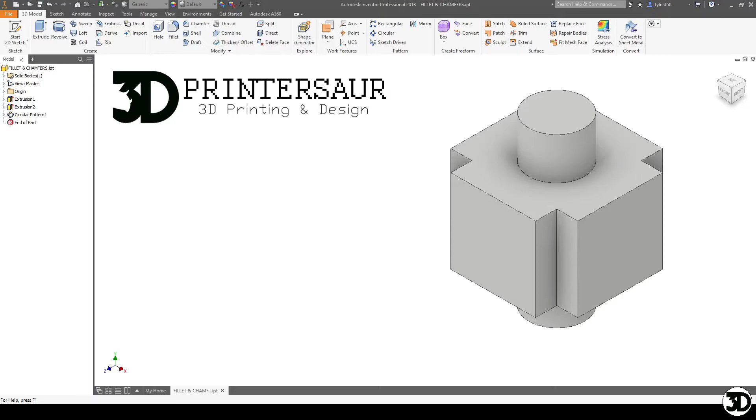These are both great features to get rid of sharp edges, to add details to a component, or to potentially strengthen a zone that you have on a feature.

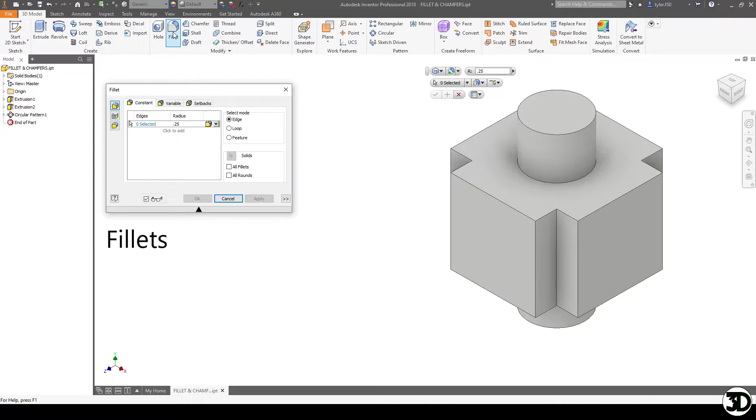So to start off with, we're going to use the fillet feature. This feature is great because it adds a rounded edge as compared to the chamfer, which gives you more of a straight cut edge. So we're going to just do a quarter inch fillet, and we're going to use this edge here. And as you can see, as soon as I click those edges, it rounds them off.

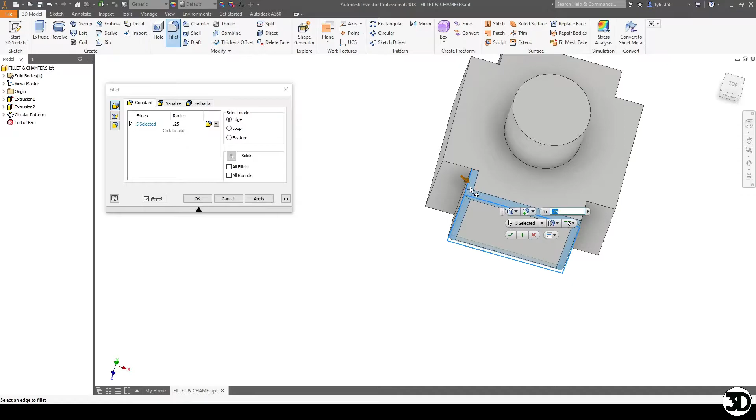So here you can see it's rounded all those edges. I can also choose these edges here, and what that'll do is it'll just give it a little bit more of a rounding detail. I would typically do this for, let's say, a lid for a box would be a great example.

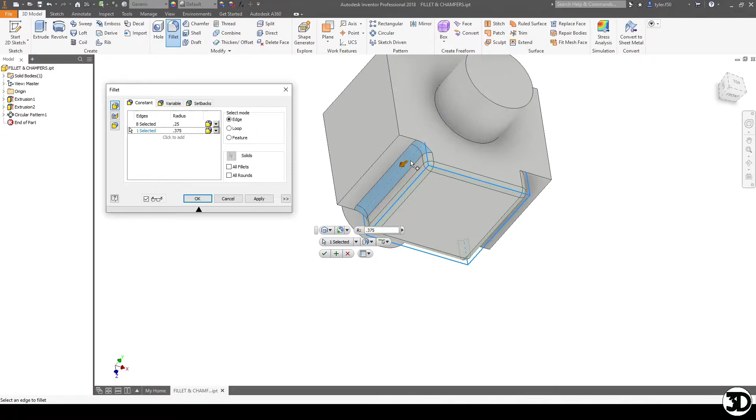A whole slew of different things, of course, that's up to you to find out. Next thing you can actually do with a fillet is this detail in here I could do. So I'm going to click to add, and I'm going to add another one that's going to be a little bit bigger, 0.375, and click it into here. So you can see I've made a bigger fillet on these two edges, and essentially what that does is it just makes it so there's a little bit more material and there's less of just that corner edge.

Of course, if I wanted to change this, I can make it 0.125 and it can make that fillet in there as well.

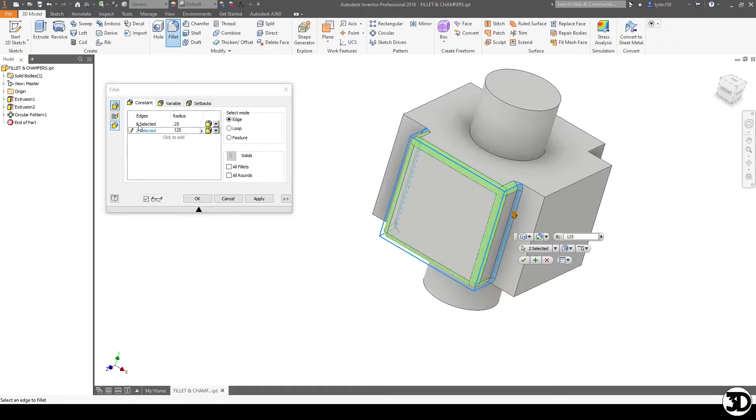Another thing you can do with a fillet, and this is one of my preferences for a cylinder that's on a surface, is doing a fillet on the bottom where it connects to the top of a surface. I typically find that what this does is it takes away the pressure point of that straight edge meeting, and it just evens it out throughout the curve.

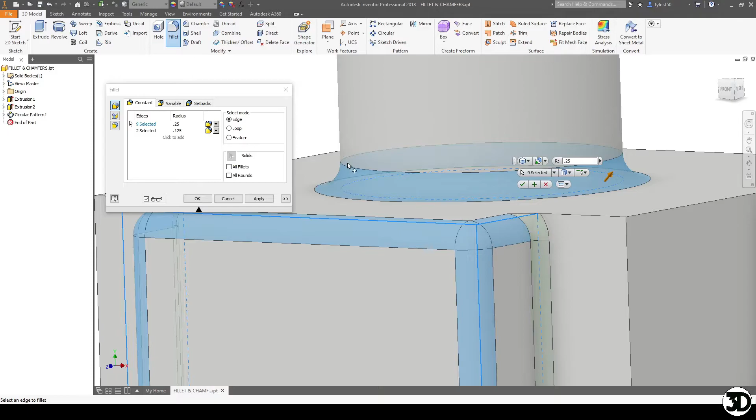Another thing you can do is a fillet on the top edge. I usually like to have a chamfer on the top, but that's just because of the engineering background I have with metal. That's usually what they do when they have a lathe. So that's some of the features you can do with the fillet.

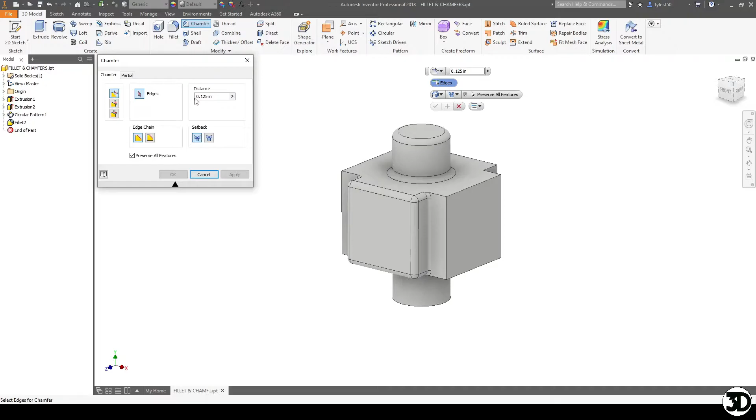Now that we're done with that, we're going into chamfers. There's a couple ways that you can use these. So to start off with, we're going to just use it the basic way. We're going to just turn this around the other way, and the basic way would be, let's change this to a quarter inch.

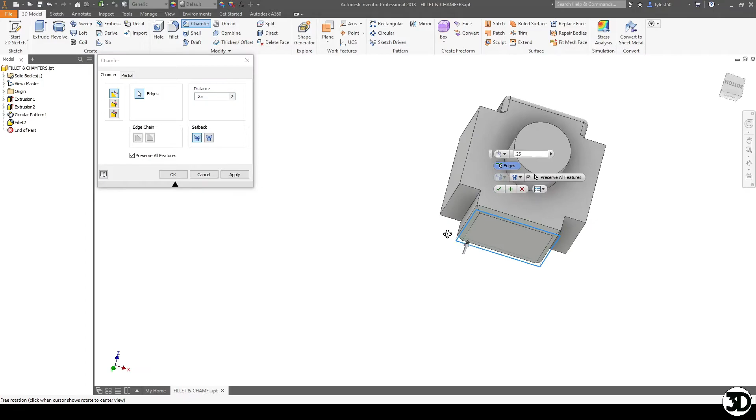You just choose an edge and it'll automatically cut it a 45-degree angle at your specified distance. This is probably the easiest way to use a chamfer. It's very simple, and in fact a 45-degree is very commonly used for 3D printing, as you won't need supports if it's on the bottom edge.

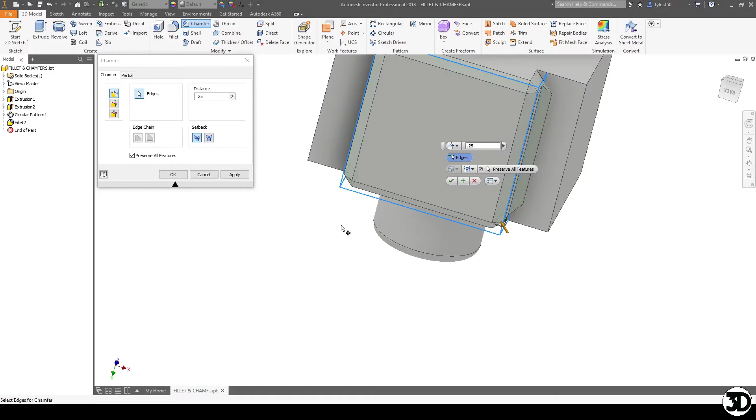So if I were to technically print this surface, I would not need any supports except for these edges that are overhanging too much. So a thing to note is chamfers are very helpful when it comes to making some 3D prints a little bit easier.

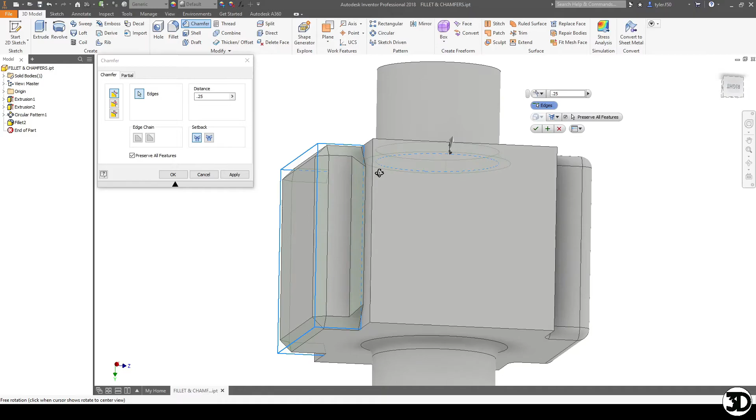So this is one way of using the chamfer. Another would be, of course, to chamfer the cylinder that's meeting a bottom of a top of a surface. I don't normally like to have a chamfer there; I prefer fillet just because of that rounded feature. But again, it could still work if you want.

But I do like having a chamfer on the top edge. The reason why I like having a chamfer on the top edge is it makes it easier if it's a pin that needs to fit into a hole - the chamfer just makes it a lot nicer to have that fit into place. Otherwise, you can use a fillet if you like. So that's the first way of using a chamfer.

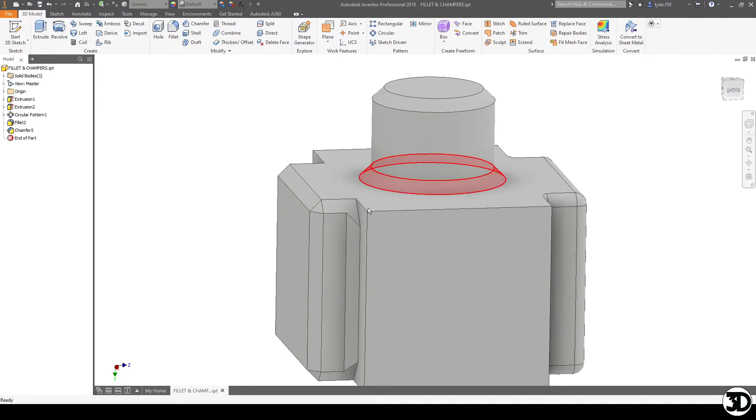The next way to use a chamfer is to actually do a distance and an angle. This is one of my preferred ways of using a chamfer if I don't like a 45-degree angle. So you choose a surface, and then you would choose an edge. For example, we can choose all these edges here.

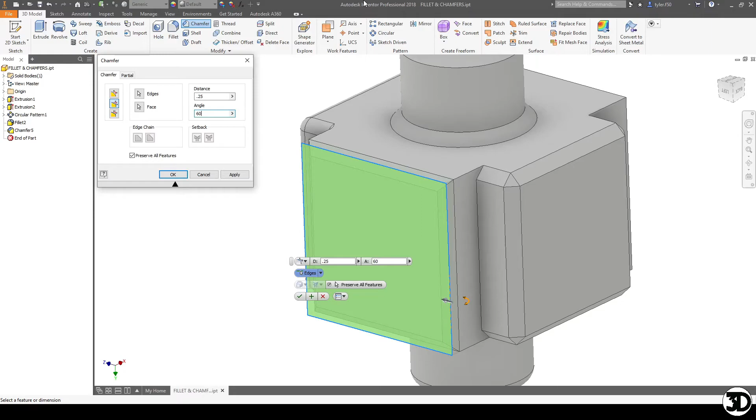And then what you can do is you can actually change this to say, let's say 60 degrees, and you'll see that the angle actually got longer compared to the 45. So if I went back and did 45, you can see that it has actually extended quite a bit. I can also do 30 and it makes it shorter. So this is the great thing about angles, is it lets you change how much of the bevel that you're making is going to be there.

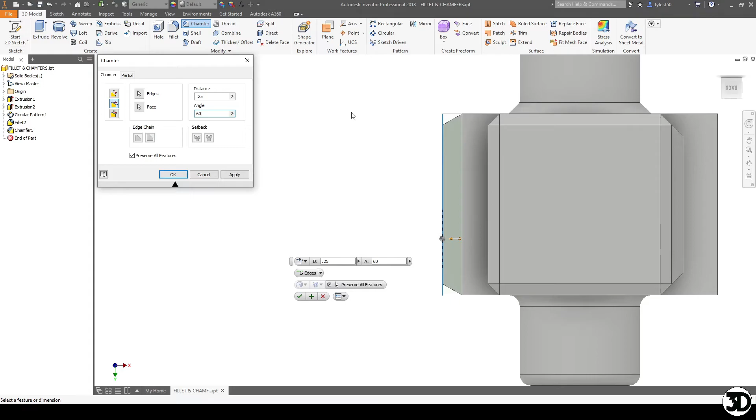Another thing you can actually do with these chamfers is you can do the corners, but you'd have to choose a new surface and then choose that chamfer. So let's say I want to make this 30 degrees. So you could have something like that.

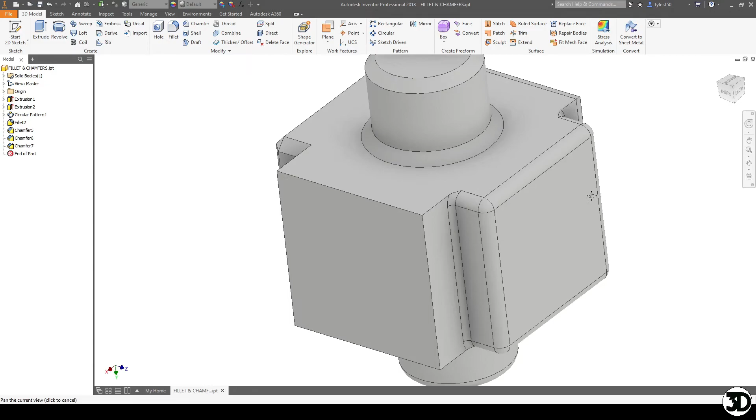The last way to do a chamfer is my least favorite way to go because it involves a lot more work. But if you know the distances you want to use, it's definitely your go-to version.

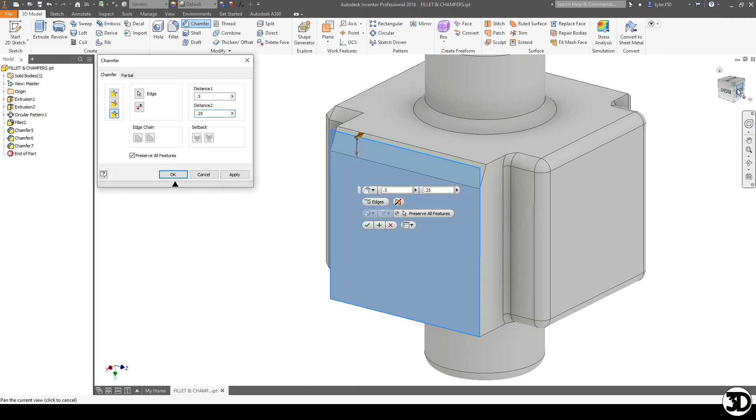So you would choose an edge, and then you would say your two distances. Let's say I want it to be a half inch by a quarter inch. Now you can see it's going to automatically make your angle for you, but you can only choose the one edge. If I chose another edge here, it's going to just switch it to that edge.

Another thing to note is I can flip it so that it has the distance on the opposite side. If I didn't like where it's sitting, instead of changing the dimensions, it does it for you. That might not be in all softwares, but it's a nice little add-on if you have it.